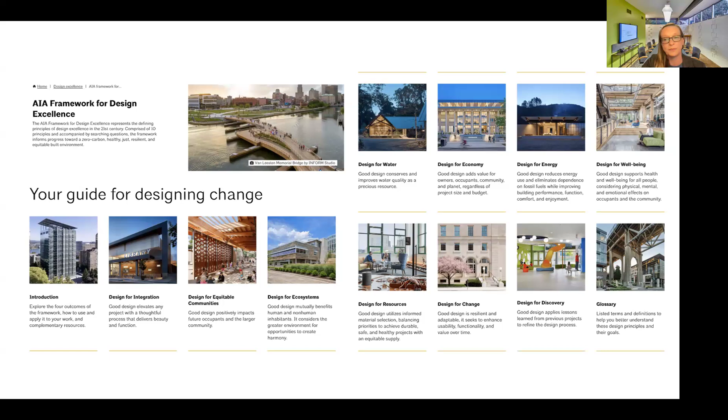And I'm going to pass it over to Bang just to introduce the Amber residence. Well, thanks for having me, first of all.

Yeah, this was a really special little project for us. We do a lot of housing, our small practice, a lot of multifamily stuff. This was a great development, which Beth had a huge part in doing the master plan with her team. It worked out well for us because these were the 2 smallest lots in the entire development. We teamed up with a developer who was able to build almost 30 units, and we talked him into buying these 2 small lots to become part of the portfolio, because construction costs on very small projects are actually quite expensive per square foot, so it's very difficult to do.

We've been wanting to do this. We've done prototypes at our office, and this was one of the first times in 10 years that we finally get to actually build some. I won't go too much into it as we move further, there'll be more detail, but these are exactly 1,000 square feet each. It just kind of serendipitously happened that way.

So the first measure is design for integration, and it talks about how good design elevates any project. It's thinking about beauty and function and balancing those two. How can you lift the spirits, delight the senses? And also from a functionality standpoint, can you have the kickoff meeting with all the key stakeholders on the project? So it's a little bit of beauty and delight, but also the integrated design process.

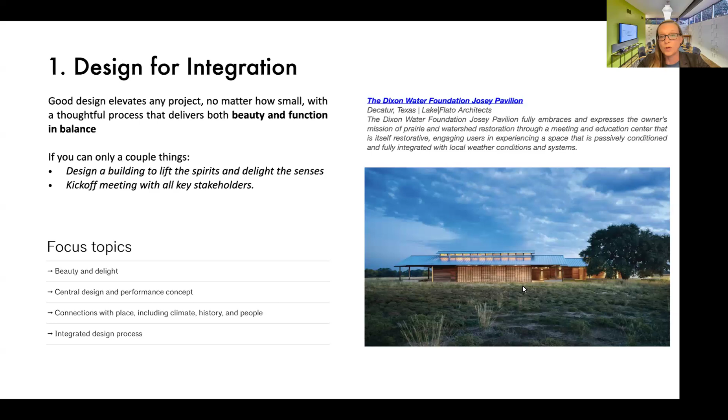There are also examples on the Framework for Design Excellence website. I've pulled some of the most applicable ones to our region, but if you want more information or other examples, they're all on the Framework for Design Excellence. They mostly pull from COTE Top 10 Design Award winners, so you see a lot of different projects because they always submit for COTE Top 10, but there are a lot of other great projects too. I just tried to pull ones again from our region.

So as far as design for integration, Bang, what did you think for that one? Yeah, obviously beauty and delight, I'll leave that for you guys to judge. Obviously we aim for that on all the projects, but I'll talk a little bit about that.

That kind of has to do with the place too. These two lots are at the very end of this development, meaning you come in from the front and drive all the way down past all the other villages, and you get to these two, and they're the smallest. The advantage is they bank up to the edge of the creek, and unlike other new developments, these trees are very mature. So that's a huge advantage we have in terms of the place.

In terms of placemaking, we actually rotated these units so that the front door faces the creek and the back of the units face the rest of the development. It works here also because in this development, especially these two units, there are no attached garages. So if you park off-site, you are entering into your unit from the front door, not from the garage. The fact that they face the creek and the mature forest of trees is an immense place to connect to the front door in this specific instance.

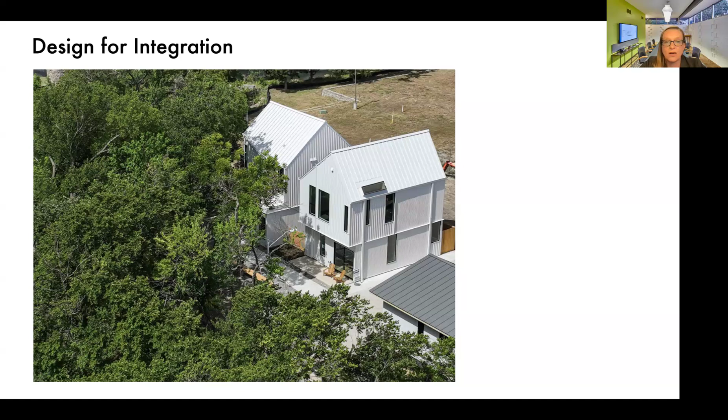The next measure is the design for equitable communities. This can look different for different projects. We thought the Amber residence would be a good case study, because a lot of times you see larger projects, but it really applies to all types of projects. The example shown here is affordable housing for previously homeless people and disabled veterans, by Brooks + Scarpa, in Los Angeles. Los Angeles has really well funded affordable housing projects, so they can do this kind of thing. But it's important to think about Dallas and Texas too, and that we can still provide equitable communities - anything that looks at good design that positively impacts any future occupants or the larger community.

Is it accessible? Is it walkable? Is it designed to the human scale? Does the project happen to think about social equity or justice, diversity, any of those things? Sometimes it's a single family residence and it might not, and that's okay. But you can still be thinking about accessibility, how they're going to live and engage in that house over the long term.

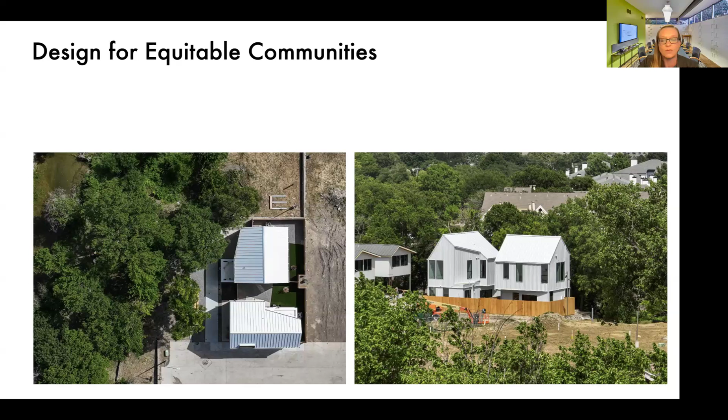So the next measure is design for ecosystems, thinking about humans but also non-human inhabitants in your site, in your region. We try to maybe avoid decorative turf grass. You could get creative with your landscape architects about how to pull in some habitats, whether it's nighttime habitats or maybe butterfly gardens, anything that would support non-humans, so birds, animals, that kind of thing. We could also look at reducing human impacts, such as less light and noise overall onto your site.

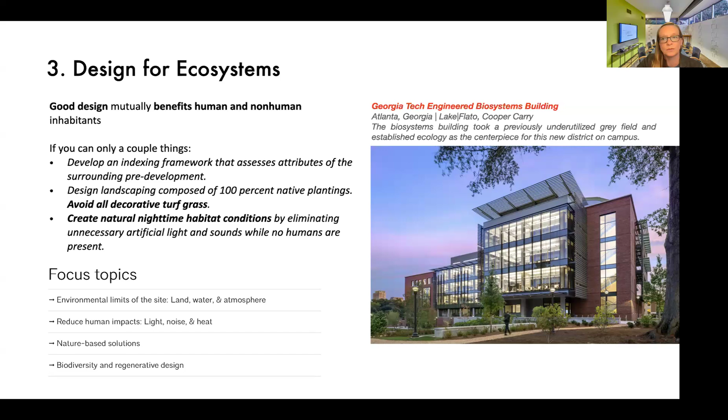Yeah, so for us, obviously the reduction of impact - these are about 500 square feet of actual footprint. They're 2-story, so they pretty much fill out both floor plates. So it's very hard to find in Dallas a sort of 500 square foot footprint, right? That's basically a 2-car garage.

Also, this kind of goes with the water consumption, because the lots are so small, the yards are tiny, and we did actually artificial turf. It was just enough for a grill or a little dog, because obviously you have the other parks in the other villages in this development, and of course you have the trail and the creek. So there was really no need for a huge yard, especially not one that used water. So the impact was really, really low.

And then in terms of - maybe that's another subject matter - but we definitely made sure, with the treehouse idea, that every room had a view practically to the creek. It's great, and there's not a lot of lighting or site lighting on the building, so it's correct, yeah.

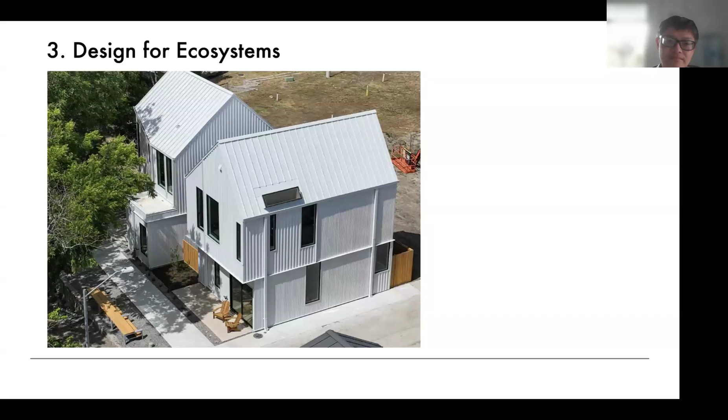The next measure is water. So we can always benchmark how much a typical toilet would use and try to reduce, to go to the low flow fixtures and that kind of thing. But we can also go beyond that and think about how we can eliminate the need for watering outdoors, or at least mitigate that down to only what's required. You can manage the stormwater runoff maybe on site, or maybe filter it and clean it up before it goes off site. There's just a lot of different options, the ways to think about this.

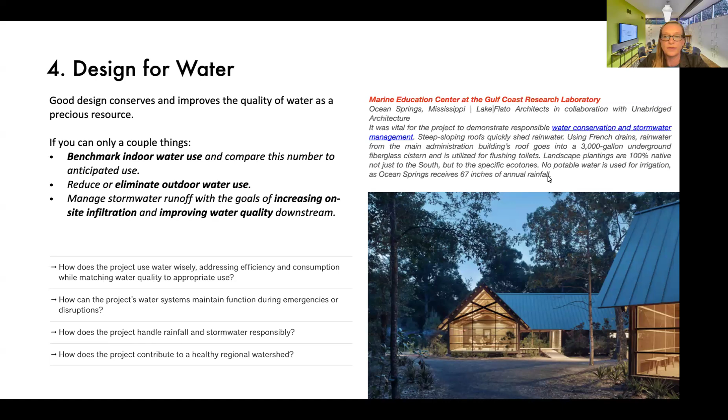So a strategy that we've used before, and we used on this one, is the narrative becomes really important for us. Now you can't ever tell if the judges actually end up reading that, right? Or do they just go down the numbers and the yes-no stuff? But here, what we do is generally I do a first pass at them and I try to answer everything, and then I come back in a few days. And there's always something that I forget in the narrative that may not be as calculable, but if the judges actually read it, it makes sense.

For instance, in this one, it was once again the small footprint - the less footprint you have, the less you disturb natural drainage, right? So that's huge, so we put that on there. I think if this was a lesson for others filling this out in the future, for projects that don't lend themselves to a very robust sort of energy conservation, sustainability, green building kind of project.

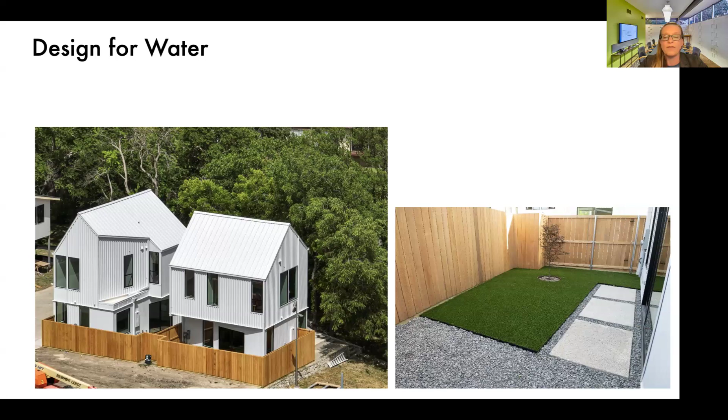The judges can really judge this however they want. The Common App is just one piece - they're looking at the overall design, the beautiful images, the floor plans, everything. So they understand what good design is, and this is just one aspect. If they wanted to dig in a little more, they have that narrative to understand, especially when it's something unique or different than what's in those yes or no questions.

Like Ben said, reading over the 10 points of the framework just gives you a chance to figure out which one of those was most important to you in that project, and the narrative helps with that.

The next one is called Design for Economy. We've talked about it a little already, but it's important to reiterate that good design also adds value for owners, occupants, community, and the planet. Some things we don't always think about when we hear the word economy: can we reuse an existing building? A lot of our projects these days are existing buildings, so this point is huge for that.

If it is new construction, how do we right-size the program so it's not overly built? Or can you use two different functions in one space? Or can you move the corridors to be outside in a shaded area? These are all different ways to reduce that footprint whenever you can.

The other things to think about are materials. We'll get more into that in a different section, but sometimes the simplest materials are beautiful, and you don't have to have fancy stone or marble finishes. Then you can even go into the narrative piece about how it was financed, any incentives that were brought in, and how it connects to the community. These are things you can elaborate on in that narrative.

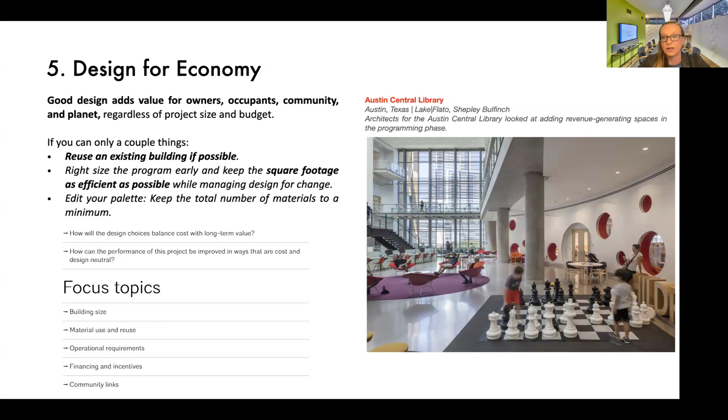But I'd like to touch a little on financing, and I think that's maybe the only way for small practices to push this type of work. Like I mentioned before, trying to do just these two projects is almost impossible because the square foot cost is crazy. And when times are busy, contractors don't want to take on 1,000 square feet of work - they can do much bigger work.

So what we did was when we introduced the developer to this development, we talked about the other villages. After there was an agreement, we talked them into doing these two almost as an experiment, but the other 28 units would cover the cost of these - he didn't have to make money on these basically. I think the lesson for us was be very resourceful in looking for opportunities to do things like that. That economy of scale really helped you. Yeah.

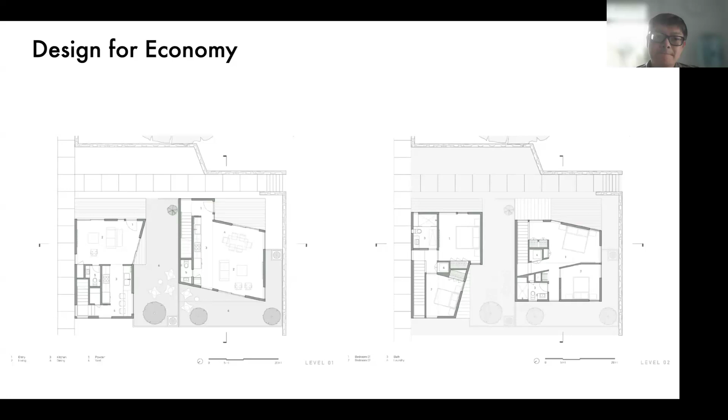Number 6 is energy, and this is the thing that I think most of us think about when we hear the word sustainable. So of course we're going to go through this, but as you're working on your projects, if you're starting from scratch, you want to set your benchmark, figure out what your goal is, how you're trying to reduce that footprint - or is that EUI, the energy use intensity, which just means KBTU, how much energy it's using per square foot per year.

The zero tool can help you with that, we'll look at that in a minute. But if it's an interior project, you look at the lighting power density. That's honestly really easy to get now with LEDs being so accessible and affordable.

And if you're not doing an energy model, the other thing you can look at is your window to wall ratio. I know we love glass, but you can be strategic in where you place that glass and still have lots of views out with a lower window to wall ratio.

And if you are doing an energy model, you can start to think about other passive strategies, such as a good thermal envelope, mostly in the roof, and really good windows, try to get the best ones you can. Then think about wall R-values, high efficiency SEER HVAC systems, and LED lighting.

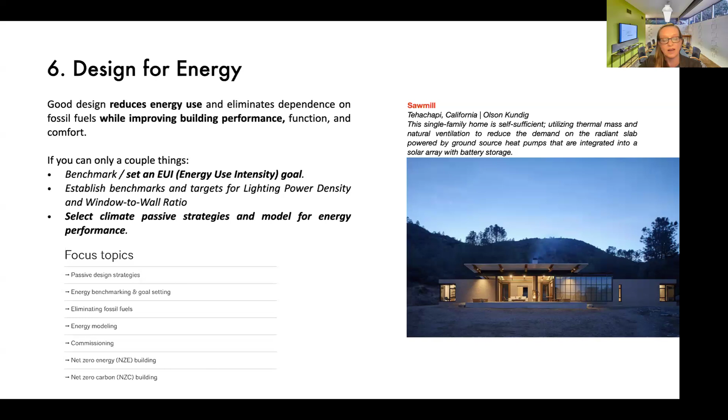I wanted to mention something that doesn't get brought up as much, which is using natural daylighting. There's a balance to it, right, you don't want a lot of heat gain, but this house, you never have to turn on the lights during the day. It's well lit naturally, which also reduces the heat from the lighting.

LEDs help quite a bit, but I also think about placement of the supply air. We usually use open web trusses for all our projects, so you can weave in between, meaning you can place the supply towards the envelope of the building and near windows.

So if you capture the envelope or close to the envelope of the building, the interior doesn't need as much supply air because you're insulated there. Little things like that.

But once again, our advantage was, you can see in that stairwell how big the trees were already there. So we could put some windows and know that at certain times of the day we're getting immense shade from them.

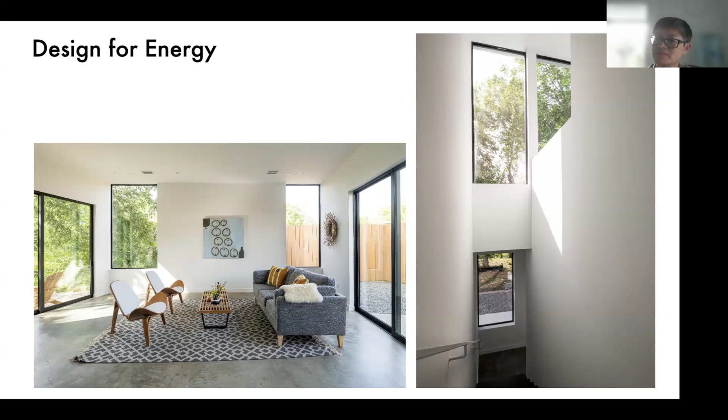The next one is well-being. This one overlaps a bit with materials, but you can also think about what encourages a healthy lifestyle in your design. How can you provide more occupant control, like in an office? How can you connect people with nature and give them a place to be healthy and be outside? You can also think about acoustics and just encouraging movement and a healthy lifestyle.

Similarly, also beautiful - for us it was the tree house. That was the well-being element. I'd have to look through my notes, but I know during construction, the whole project took a long time because we were trying to build 15 or so at the same time, and we overlapped with COVID at some point.

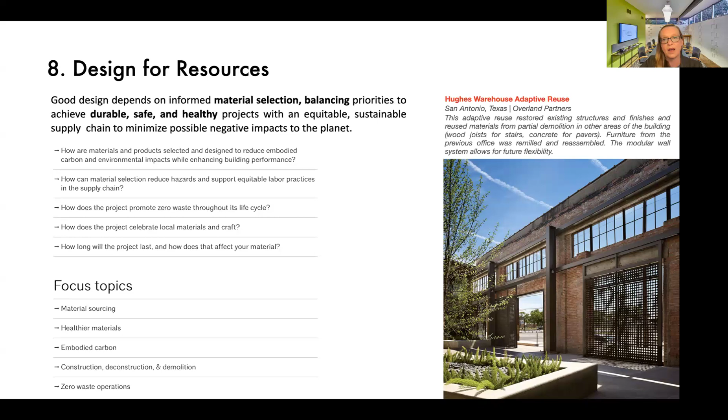Yeah, so for us, obviously given the smallness of the project, almost all our materials are locally sourced. Especially with these small projects, partly for the economics of construction costs, we try to make pretty much the whole skin one material. And that helps because it reduces waste.

Because anytime you have leftovers, there may be another spot you can use it. Whereas if you have a lot of exterior materials, sometimes you have to buy in bulk or you have to cut, and then there's no other area to use that. So what happens to that material? If you can keep a lot of projects within aesthetic reasons, almost in this one it's pretty much metal siding, and if you have leftovers, it can be used.

And for us, we had the mini rib white in other units, so we could have used them if we had leftovers. We could use them in other units here.

So I was thinking about this because I don't do residential every day, but certain studs come in different lengths. That's right. So you could be thinking about where you set your finished floor based on the length of that stud. Exactly, like a 10-foot ceiling with one sole plate and two top plates, that's a 9 foot 8 and 5/8 inch standard stud, that's what we use, so you don't have to cut or add.

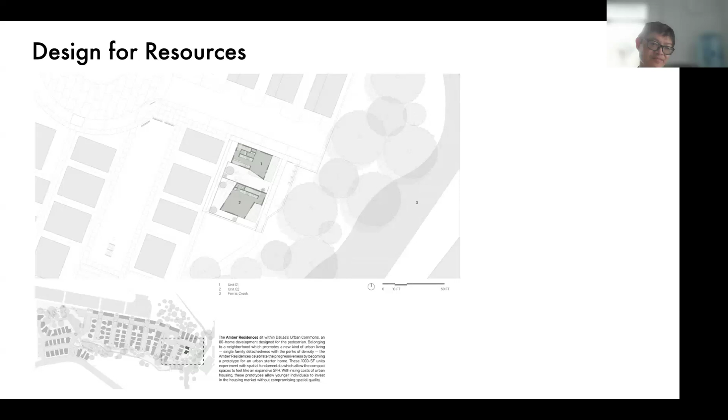Exactly. Number 9 is change, and we can think about this in different ways. You can think about it from a resilience standpoint. We're starting to think about how we can design for future scenarios, whether it's a library that needs to be a resilience hub for a social construct, if there's a crisis happening, or a brownout or blackout, a place for people to get water and internet, those kinds of things. If it's a house, maybe it can be taken down and reused in a different location. There's all kinds of options here, so we're looking at risk and vulnerabilities.

We're thinking about passive survivability. Maybe you lose power for a day or a couple days. Can you live in your house? Can you live in that building or work in that building without power for a day or two? If you have a good thermal envelope and good shading and different things like that, you can. I know it's hot, I know it's Texas, but these are things that we can think about and design for.

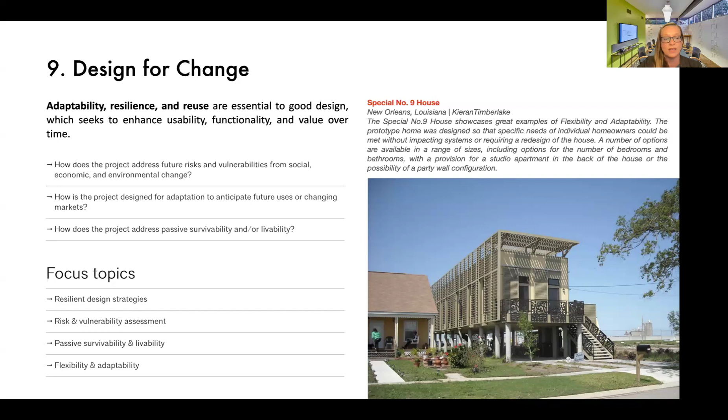So in this one, the shade, we were thinking about, could you live and work for a day or two? And it was the daylighting—you could work, you'd have plenty of natural light. But the other thing we thought about was flexibility. If you look at the plan again, a lot of the rooms could become second, third bedrooms pretty easily, and that's what we thought about.

We thought about the pandemic a lot. If someone needed to come and stay here, like an older person needing supervision during a pandemic, one of those other flex spaces could easily be converted into a bedroom—they were made for that. That's great.

Number 10 is discovery. So these are things about how can we learn from our projects and apply those lessons learned from previous projects.

You can do post occupancy evaluations. You can engage your occupants shortly afterwards and start to learn from that, or anything like that—these are different ways of thinking about it. This one might be a good one to go to the framework for design excellence and dig into a bit more. But I'm thinking beyond post evaluations, what else can you do?

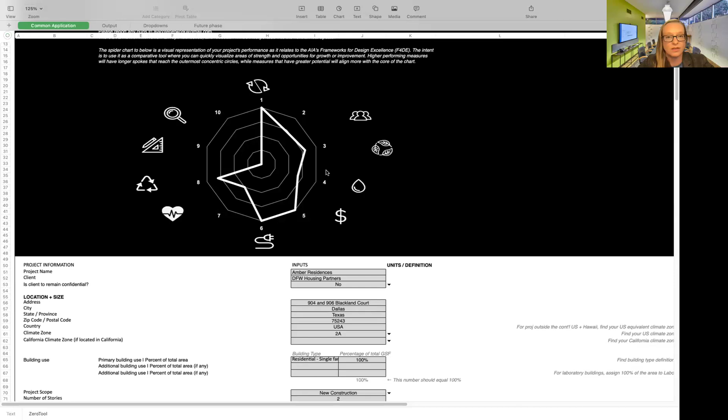The first part, I'm just going to go through kind of the basics of the Common App. You really only need to look at this first page—you don't worry about these other pages at all. You fill in the basic project information. All the gray boxes are the only ones you need to fill out. The white means it's automatically calculated, so there's nothing for you to do for the white ones.

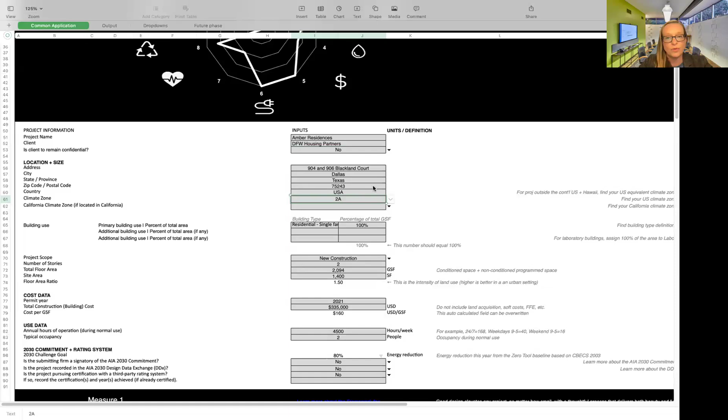The little triangles mean there's a drop down in the gray box cell, so anytime you see a triangle, click on the gray box cell next to it and it'll take you to that drop down. Other things to know about the Common App: there are tons of resources over to the sides here. If you get onto something and think, I just don't know, I've never heard of the zero tool, that's no big deal—you click on it and you don't even need to know all of this information, but if you wanted to dig in a little bit, you can. It's not necessary to understand the zero tool to do this, it's just in case you wanted to learn more.

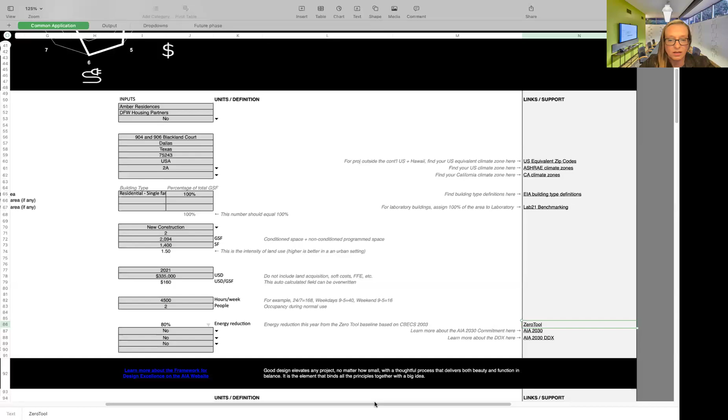As I said, there's no calculations within the Common App because it has all of that already done for you in the white boxes.

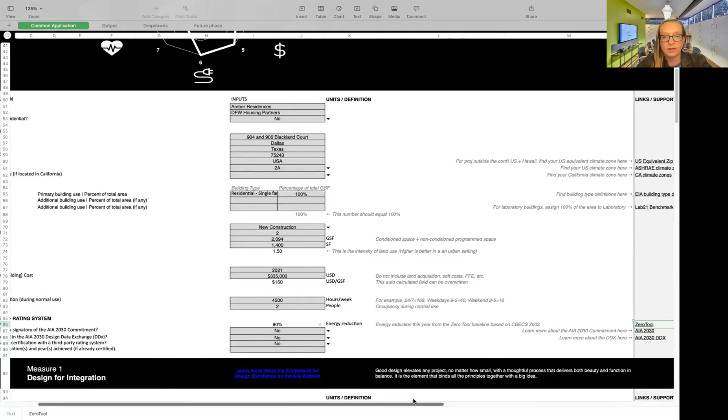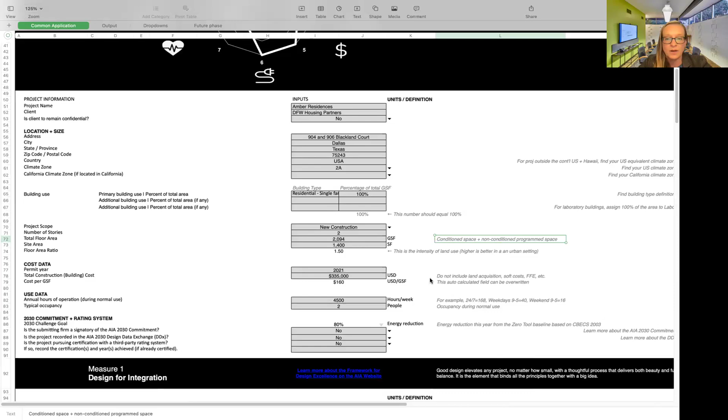Other things to know: for example it asks what is the total floor area, and you might wonder what they mean by that. It means they're asking for the conditioned space plus the non-conditioned program space in your project. So it's kind of giving you instructions or definitions along the way.

So I still reference these all the time, and I also go to the links if I want to learn more about things.

The other thing that's kind of new for this year is we have links straight to the framework for design excellence for each measure. So anytime you're filling something out, maybe you're working on your narrative for design for integration and need to refresh your memory of what that could mean, this is what that looks like.

There's one for each measure. It goes through some of the questions you may ask yourself, has the focus topics, and then they call it a toolkit, but it's thinking about the high impact things, best practices, and any other resources that are available for free.

And like I was saying, the case studies are all here. AIA is working on updating their case studies. Some of them aren't too bad, not super old, but they've all been past COTE Top Ten design award winners, so they're really good examples.

All right, so then we're going to just kind of fill this out, and we based this on the Amber residences so we can have a better understanding of what that might look like for a residential project.

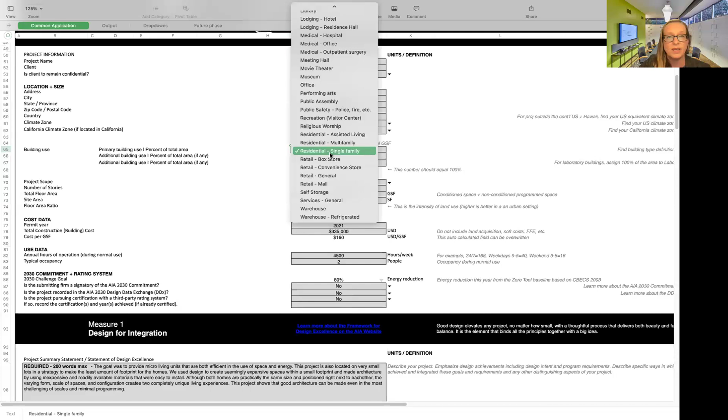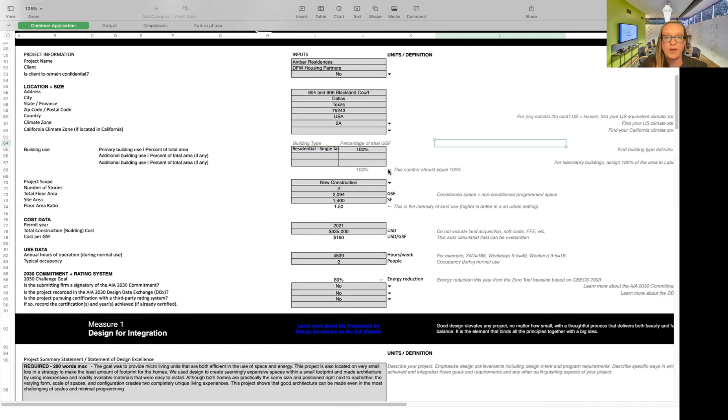If it's a mixed use project, say it's a library and office space - the city of Dallas is trying something new - you may say maybe this is 50% library and 50% office, so you can make those distinctions here. If it's super mixed use, I'd say just do the top 3, and then make sure it equals 100% at the bottom.

Obviously this is just whether it's new construction, renovation, or interior only. This information up here is really just helping you once it gets further down - it's not affecting the spider graph at this point.

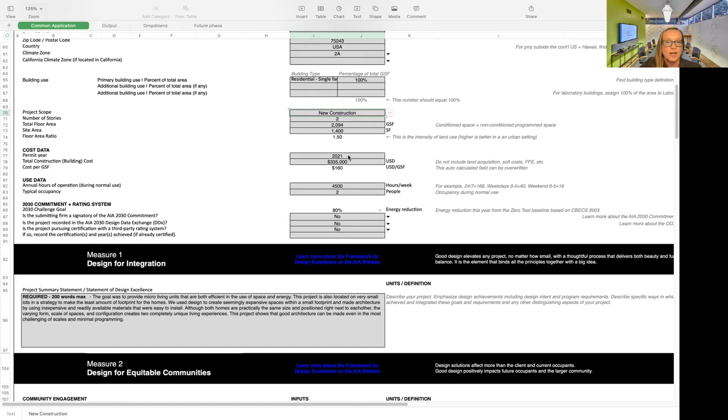It's talking about the permit year and how much cost - that gives you the cost per square foot - and how many hours you're going to be in there on a regular basis.

Then it's just kind of asking some encouraging goals - it automatically calculated the 2030 challenge goal of 80% based on the permit year. And then we're just being honest, like, has the firm signed up for the 2030 commitment? No, okay, moving on, no big deal. If you have, great. If you haven't, let's just keep going.

Jump in on any of these that you want to talk more about. The first one we talked about, design for integration. The full Common App has 3 narratives - we've taken this down to 1, so this one is required, and it allows you to explain the overall project. You can also talk about integration strategies within the same narrative.

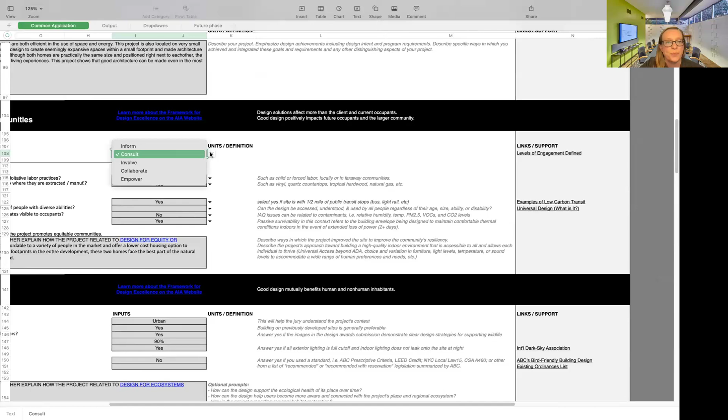The second one is again for equitable communities, and the one non-yes or no question is just your level of community engagement. There's a resource off to the side if you're wondering what consult versus involve means - it's literally a Google Docs file that we created that explains this a little bit more. It was more involved, and we've simplified this down to just this.

So a lot of houses don't even have anything, so you would just say inform. But in this case, you were able to consult a little bit with the developers and other people, right, Bing? Yeah, and Diane Cheatham, in understanding the master plan, basically.

I left this one blank because it's new. It says, are universal design principles incorporated to meet the needs of people with diverse abilities? It's talking about age, physical disabilities, or anything else you could say.

The other ones are talking about passive survivability again, and that shows up later on as well. Then if these don't apply, maybe you talk about what you did do instead, which Farandang did in this example.

Again, the rest are all yes or no questions. Ecosystem is like, where's it at? Urban, suburban, rural. Was the site a green site, meaning was it previously developed or not? Yes, it was — I mean, almost every place, unless you're out in the middle of nowhere, has been developed in the past at some point.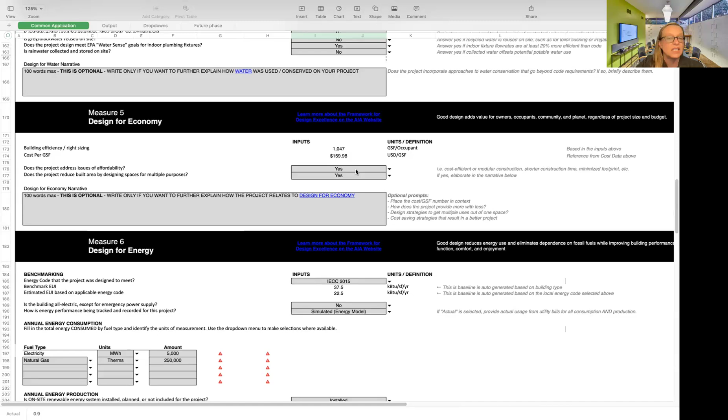Economy takes the information from the top and gets that cost per square foot. But it also asks, did the project address issues of affordability? In this case, yes, it did. And if it didn't, just say no — it's no big deal.

Energy — what we want to do here is, depending on where your project is, put in the energy code applicable to your project. You know this because you already did the REScheck or COMcheck to get the permit. The state of Texas is required to be at least the 2015 IECC, so unless the municipality upped that, it's probably this one. Then you can see the benchmark EUI, the energy use intensity — that's KBTU, so energy per square foot per year.

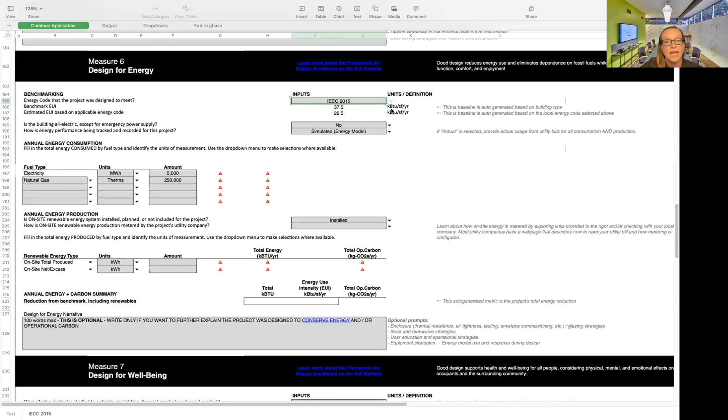It was automatically calculated from the information at the top. Is the building all electric? In this case, no — the Urban Commons had natural gas, because it was an efficient heating source. Now, since that project, we're kind of moving as an industry away from natural gas because it's a fossil fuel, and because a lot of mechanical systems have gotten so much more efficient with all-electric. But it's always that balance. So we just said no, and moved on.

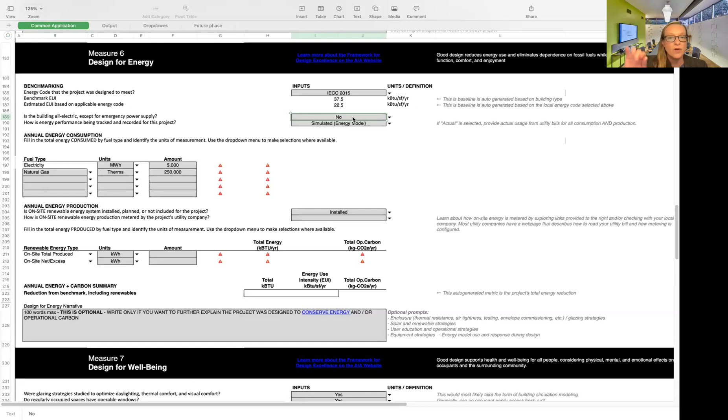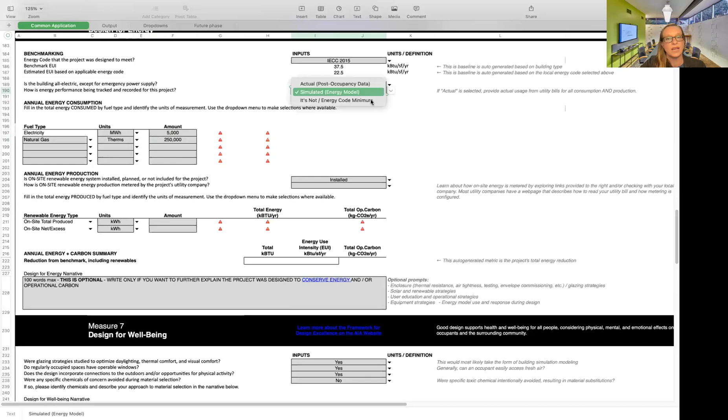This one, I think I changed — it's actually just energy code, so that's what we did here. If they had run an energy model, you would say simulated energy model, and then start to fill these out, and it'll automatically calculate that. If you ran an energy model, this is at the very bottom of the model — it's right there. But if you didn't, you just need to say so and leave all of this blank.

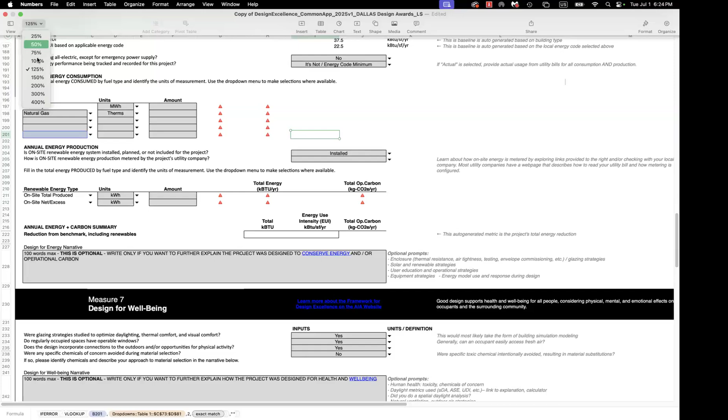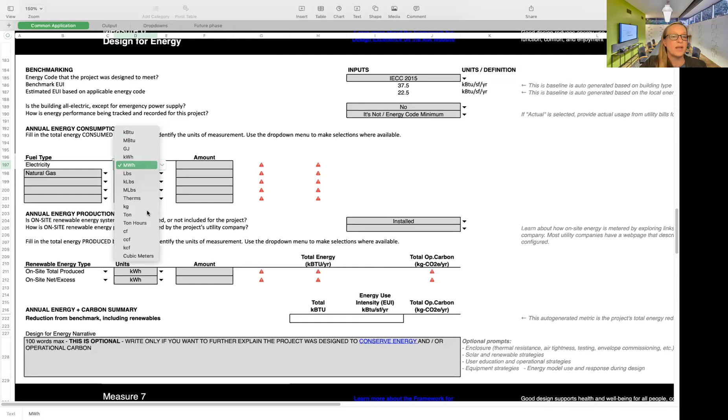So if you have on-site energy use, like photovoltaics or anything like that — sorry, jumping back — the other option here is that you're actually keeping track of the energy use. If you are, you would click actual, and then fill out how many megawatt hours, and you can even change this to the metric you're keeping track of. So if you've gathered up your energy bills over the year, you can add those up and put them in here.

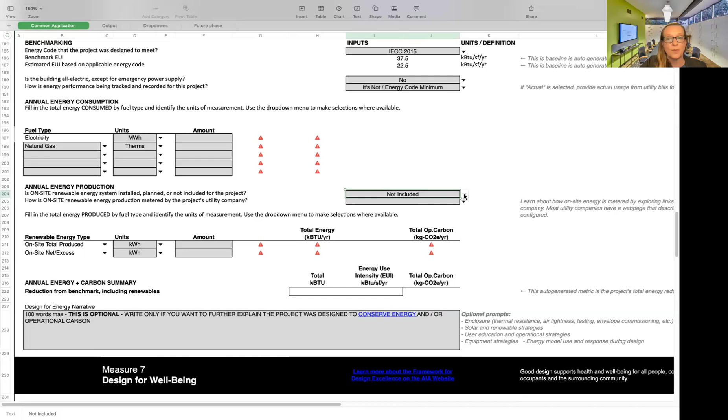And if you do have photovoltaics or any other on-site energy, you would mark that here. In this case, we don't, so we can leave all of this blank. But if you do, you'd fill these other ones out. All of the kBTUs, EUI, all of that gets automatically calculated, so you don't have to worry about the white spaces.

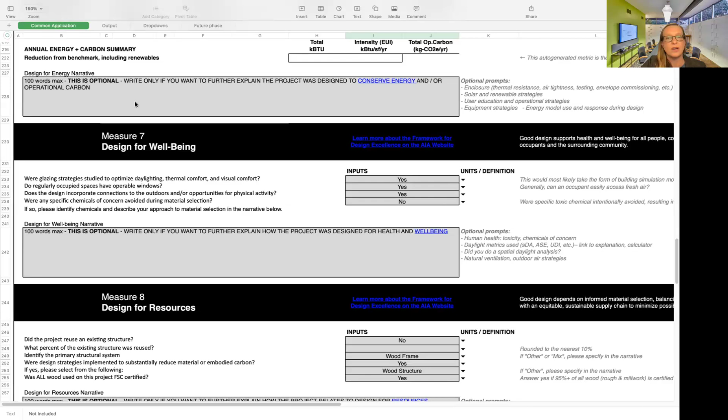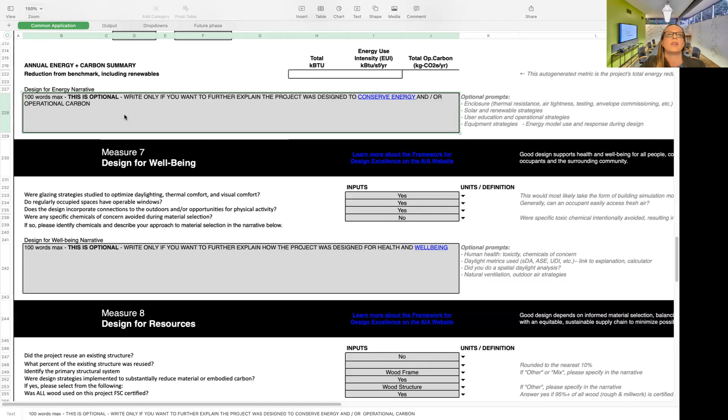And say that for whatever reason you want to explain your energy use or your design for energy a little bit better, all of these from measure 2 all the way down to 10 are optional. We've added these back in so that anyone working on their submission can elaborate on these different measures if they choose, but they don't have to.

Well-being is all yes or no questions, operable windows and such. Number 8 is asking if you reused an existing building. If you did, that will help you in this case. And if you didn't, obviously this one didn't, it was just new construction. If you did, it asks how much of it was reused, so just do your best to calculate that.

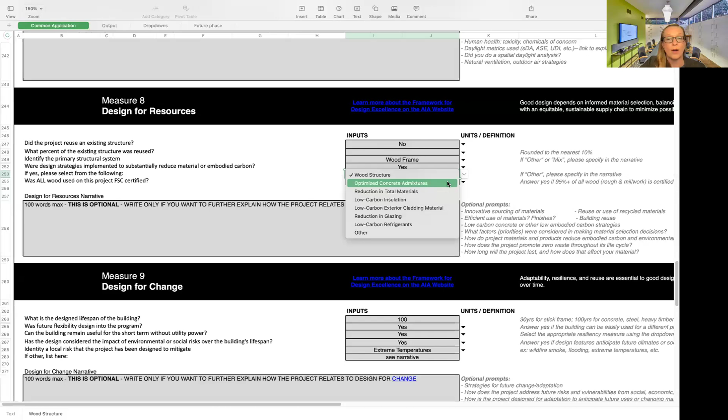The primary structural system, and was any strategy taken to reduce embodied carbon? So if it's a wood structure, that helps, that's low carbon material. You can look at these different drop-downs and see if that applies to your project.

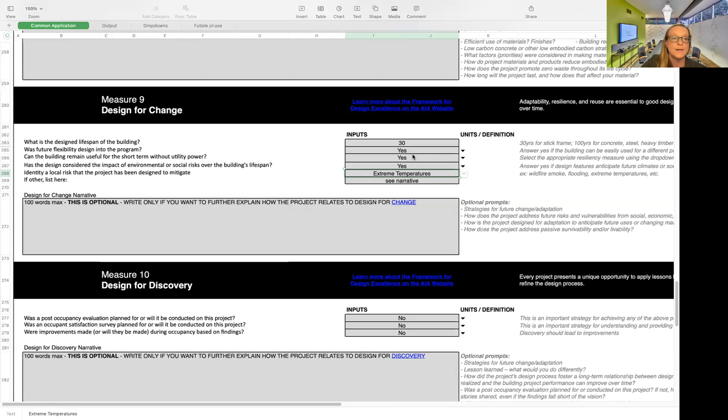The last, number 9, is design for change. So this should be 30 - I was messing around to see if it changed anything. Stick frame, it gives you some examples off to the side. For stick frame, it's 30 years. If it's concrete, steel, etc., that's 100. And then you can make your best assumption on the lifespan of the building.

Was the design flexible, as Bing was saying, so any of those spaces could be adapted in the future. And then it's talking again about the different mitigations - these are some of those things we talk about, from passive survivability, social unrest, pandemic, anything incorporated into that.

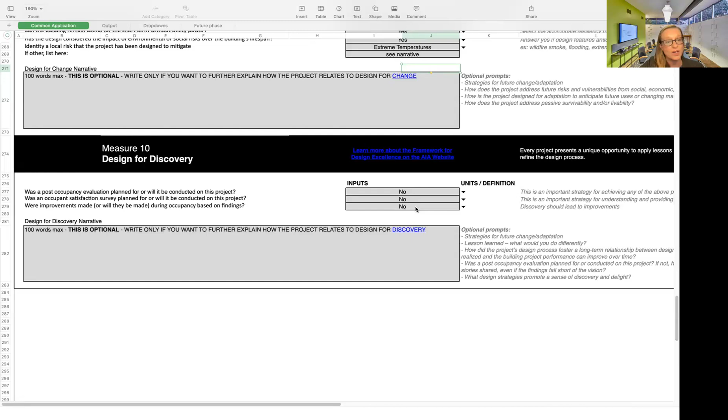And then the last one, they're just asking about the evaluation, any occupancy surveys and that kind of thing. And if not, then maybe you go into a little bit more in the narrative, as far as in the Amber Residences - sounds like we could have talked about how this was an experiment for you guys to design more economically in the future and take those lessons learned.

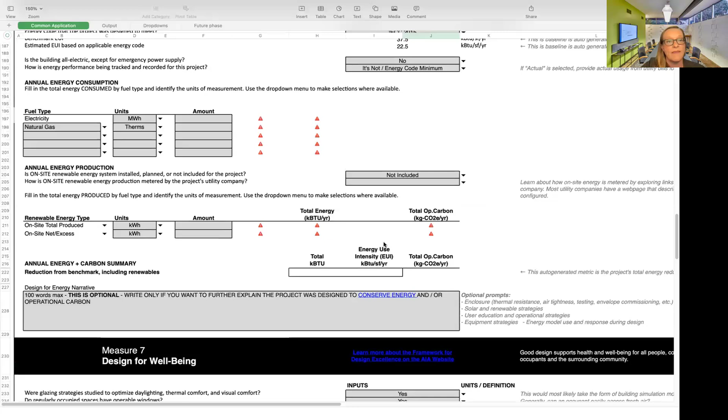So that's kind of a quick run through. I'm glad to take questions, thoughts.

All right, the first question we have in the chat is from Winston. He says, how do you tell the legacy and history of a firm? In the examples, many of the projects show new and present projects, but there isn't much history. Or is it not a big interest in submissions? Or is there a limit you would suggest in showing, like no projects over 5 years old?

Winston, are you talking about submissions in general, or is this specific to the Common App? In general. So in general, our submission requirements do require that the project was completed within the last 5 years.

Does that answer your question? We also have a question from Robert in the chat asking, how did you calculate the estimated EUI? Are there easy residential calculators?

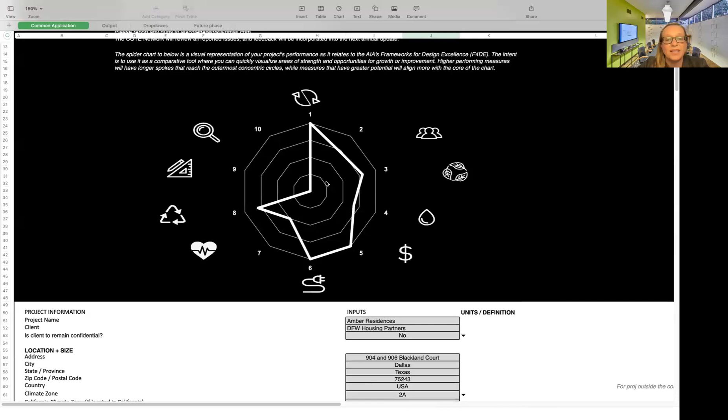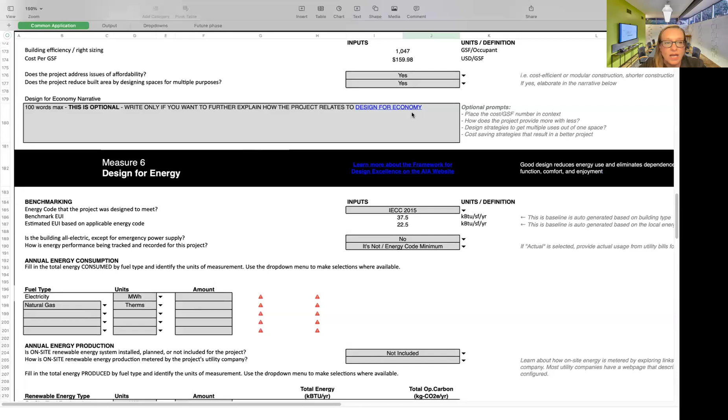So that's a great question. Let me share again. It does it for you automatically. So once you type in what it's used for and how many hours are being used, and all this information at the top, you can see that the EUI is automatically calculated. So here it did an automatic benchmark based on the information above. The benchmark EUI was calculated to be 37.5.

And then because they met the 2015 energy code minimums, it knows based on an old building, a similar building done in 2003, that's the benchmark. That's where the benchmark comes from. It's called CBECS, and it just means an average building of that type from 2003 compared to today. That's set in stone - all the benchmarks for the EUIs are based around that. And so because we're now in 2015 and we've met the energy code for 2015, that's how it came up with the estimated EUI of 22.5.

So you don't have to do it at all. All you have to do is fill in the grays and it will tell you what that is. Does that answer your question?

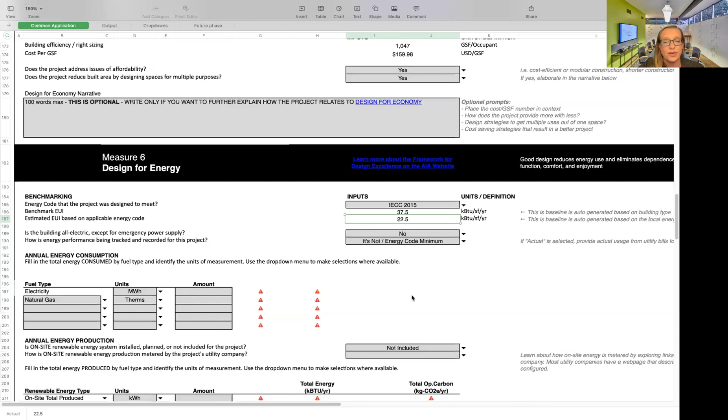I can't see the chat, so you have to tell me, Cassidy. Yeah, Robert has not responded in the chat yet. Oh, he says yes, great. Those were our only 2 questions in the chat. If anyone else has one, please go ahead and put it in now. I know we're running late on time, just a little bit, but happy to answer any final questions that get thrown in there.

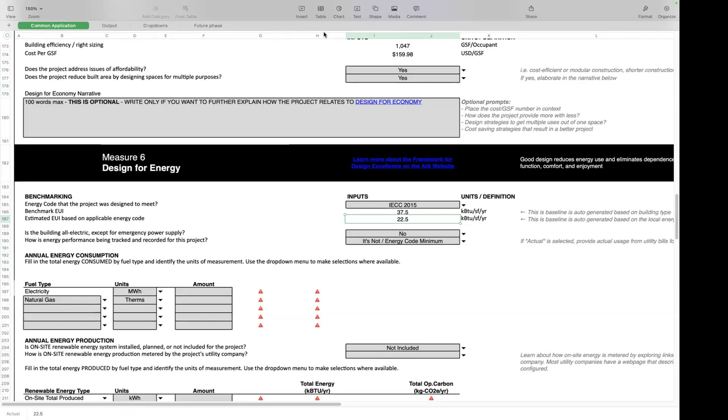Just had one quick question for Bang. I know he's done a couple of these for the design awards now, a couple of the Common App submissions. I'm wondering if you start thinking about these things sooner now as you're working on projects, or deciding which projects would work well with the framework.

Absolutely, David. Sometimes you have projects that are just not aligned with this, unfortunately, but absolutely. We're trying to push this more in the single family custom too, because it depends on the personality, but we definitely try to push that. I think you benefited a lot on this project by, like you were saying, the integrative process at the beginning, having everything master planned and having a low impact planting scheme and all these things. I think that integrative approach is really important.

Yeah, and I think just having to fill them out so many times, you can't help it, it's in the back of your mind. But honestly, the fact of filling them out forces you to understand the parameters better, right? And learn new things that you didn't learn before. And then sometimes you're better able to communicate with a new client about why you should do this, you know.